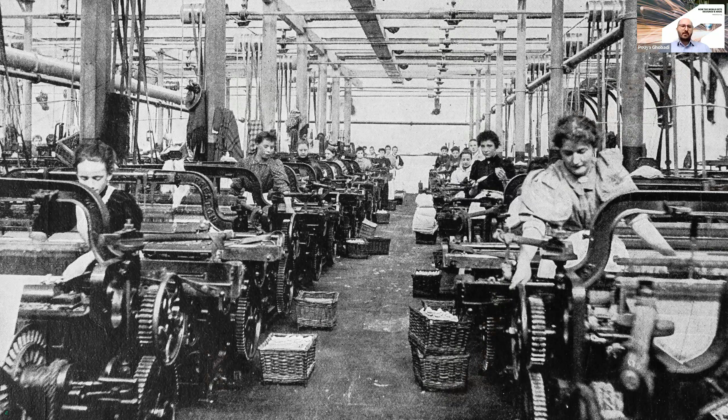Now, the focus of the session again is on factory design, but we know that factories have been around for centuries, and they have come a long way in the previous century. Not just how they operate, but the whole process of how they are developed has changed significantly. Although we have made significant improvements in factory modeling, there is still opportunity to advance in this process.

Despite all changes and improvements, even today, there are many manual, disconnected, and paper-based processes that are keeping us from achieving our factory modeling goals. What we see on the screen here is the reality of many manufacturers and many businesses. We are already stretched to the breaking point.

People spend too much time on manually managing information, tasks, processes, and decisions that could be automated, working with multiple data formats from incompatible systems, trying to overcome the multiple silos that exist in the business, trying to connect a mix of digital and analog data. So the main question our customers are asking is simply, where should I start to address these changes?

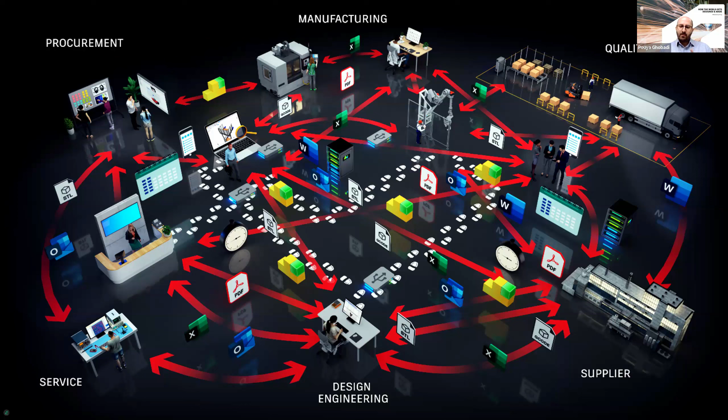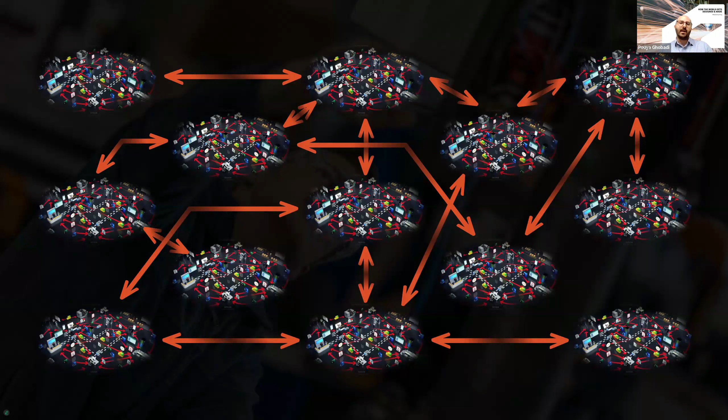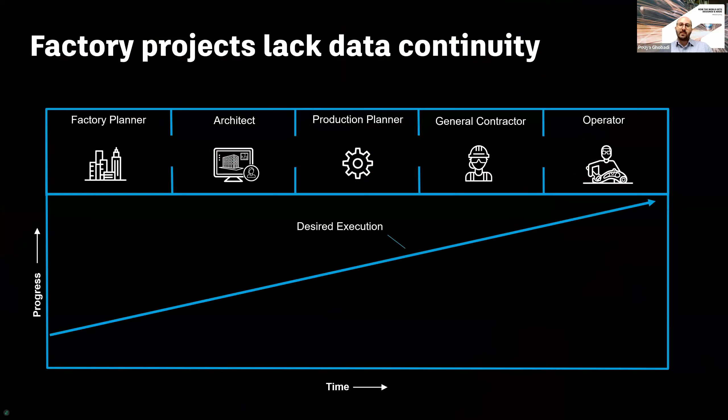But these changes go beyond this. The other challenge that clients are facing is that the chaos that we witness is not just within the organization itself. It continues across the supply chain, affecting the overall operational efficiency and time to market. What manufacturers are trying to achieve is continual unhindered project progress and delivery. But in reality, many factory owners and operators are forced to develop their facilities with disconnected workflows. This needs manual handoff between each stage, leading to longer delivery time and higher costs.

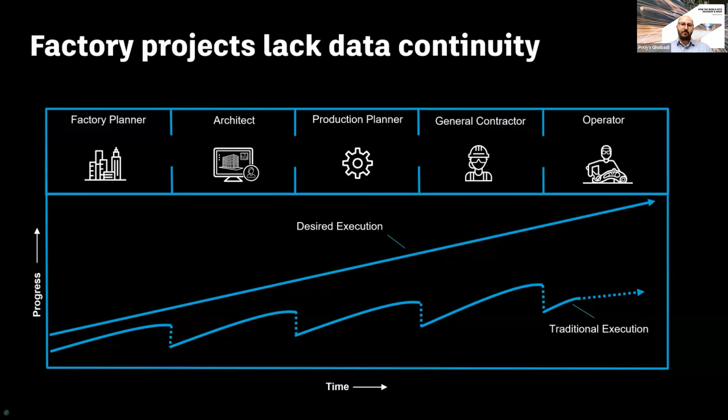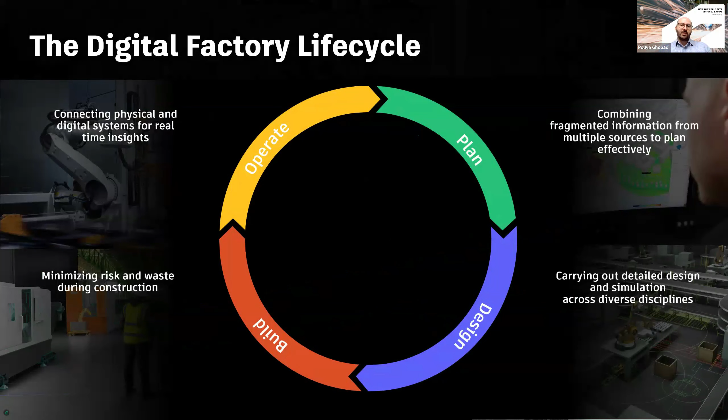Let's have a quick overview of the digital factory lifecycle, which is the goal of the presentation today. We want to digitize this process. There are four main stages of the digital factory lifecycle: plan, design, build, and operate. Each of these stages have their own specific challenges. The planning is where we formulate the approach, define the purposes, constraints, scopes of the project, and that's where we set targets. Design is about working out how we're going to realize our plans and objectives in an optimal way, surrounding both the factory and the building itself.

Then the build process is where we implement these designs, constructing the factory building and internal production facilities. And finally, operate is where we focus on optimizing effective manufacturing throughput to meet our manufacturing targets. These four main stages of planning, designing, building and operating are actually connected together, with decisions at one stage often having unintended consequences at the next step. The more seamlessly they are connected, the more efficient and effective the whole development and operation is going to be.

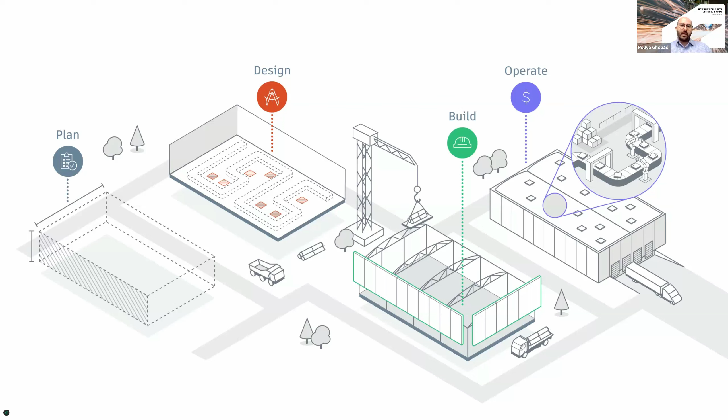When constructing and developing a digital factory, we see and we hear that customers are going from the left side of the screen to what we have on the right side of the screen, going from analog systems to automated ones, replacing fragmented and broken workflows with standardized best practices, avoiding siloed information, making it shared, validated and available to others, evolving stagnant processes to innovative ones, and finally moving away from high-waste situations to agile and lean situations.

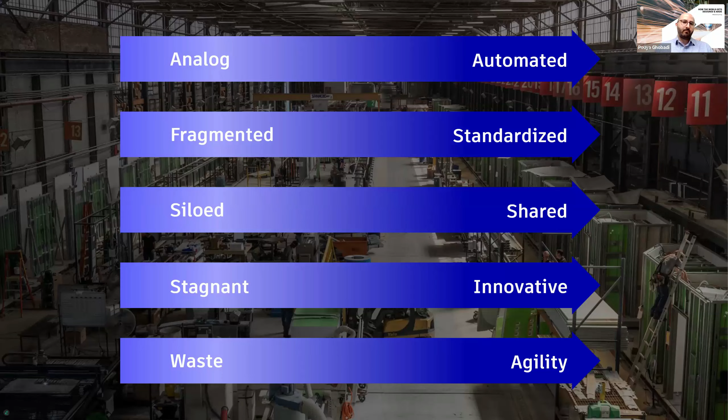In factory planning, a wide variety of trades must be coordinated, and all participants must be supplied with the latest data. This includes production planning, technical building equipment, which could be the ventilation, lighting, water piping, electricity wiring, and so on, and building design.

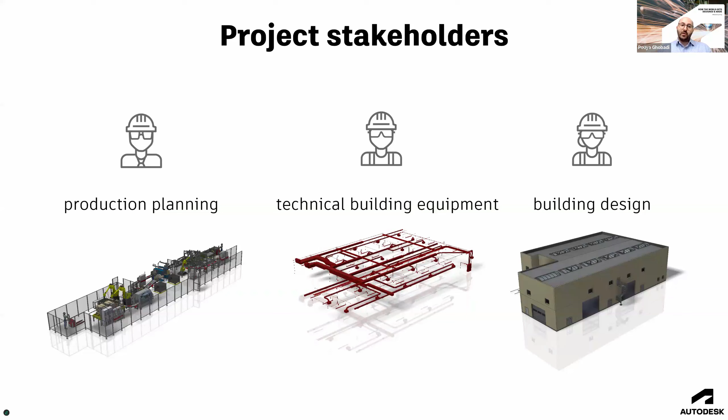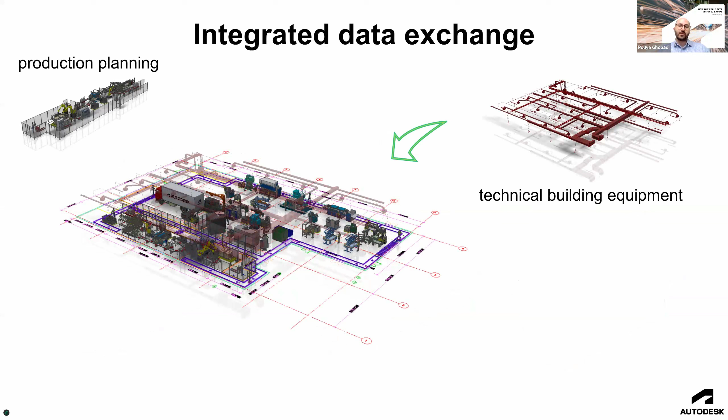Autodesk enables you to bring the data and design related to each stakeholder in one environment and combine all of those designs, all of those models all together. This enables our users to detect errors early on in the design and planning phase and avoid costly mistakes.

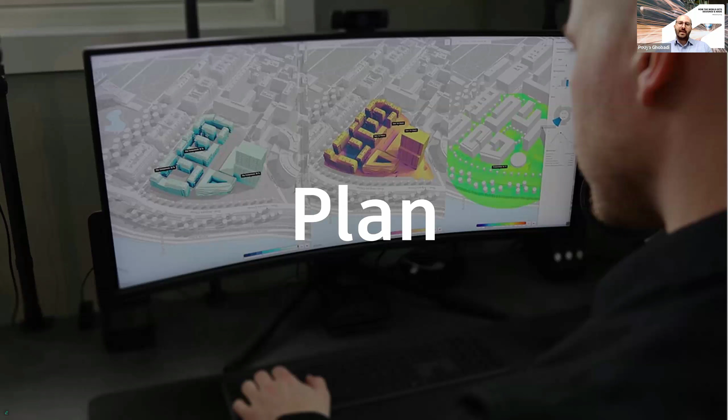So let's go through these phases. Let's go through specifically the plan, design, and validation phases and see how Autodesk can assist you in combining the data related to these phases. Let's start with the planning phase.

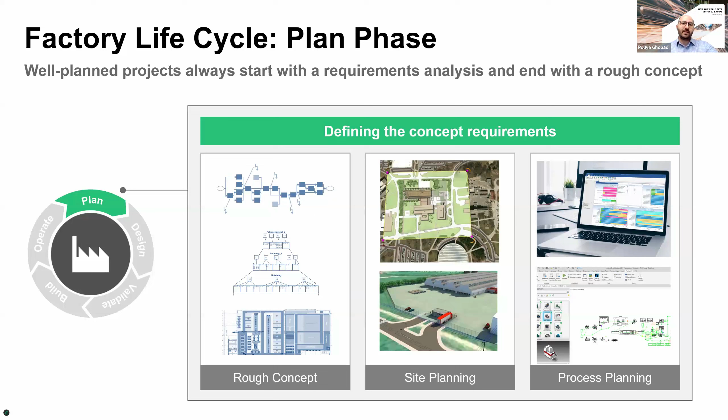Planning starts with the land or site development. Different types of planning include site development planning, process planning like the manufacturing sequencing, or it could be product lifecycle planning, and also planning for the building itself, the building that you're going to place within that site.

To address this challenge, we can utilize Autodesk InfraWorks to address the challenges associated with the planning phase. Let's say you have a plot area where you want to create the concept layout of your factory. This is where you can extract the longitude and latitudes of your site simply from Google Maps, insert it into Autodesk InfraWorks, and start building and developing your plan within InfraWorks quite seamlessly.

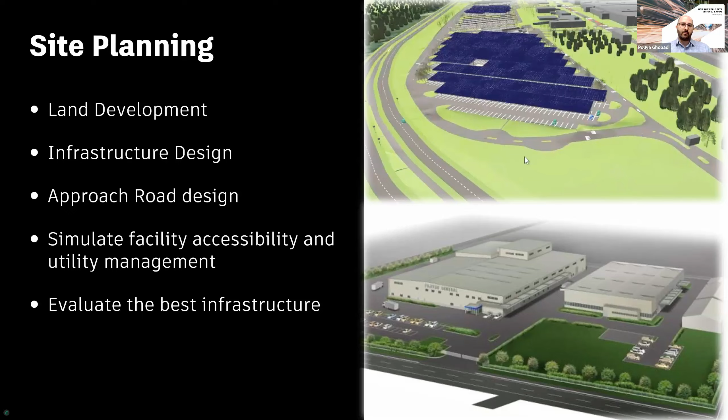Using Autodesk InfraWorks, you can define the utilization of the area, determine where the roads are going to be, design the infrastructure, and the layout of your buildings. Let's look at this in action. Using InfraWorks, you'll be able to gather the site area and mark the coordinates, as well as the boundary of the site.

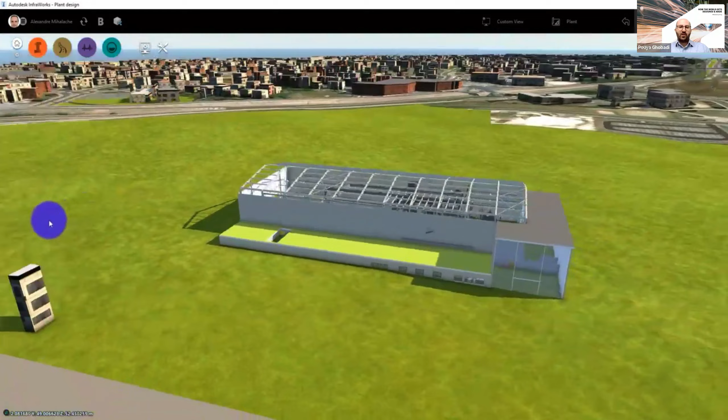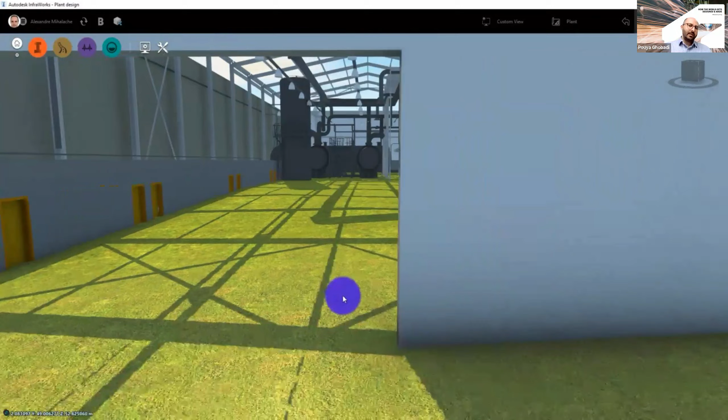Let's say you have a building like what we have here. You have a building design that was created by another team. You can bring those models, in this case designed in Revit, simply bring them into InfraWorks, and then start developing, in this example, the road layout. We have a library. Simply from the library, you can select the type of road you want.

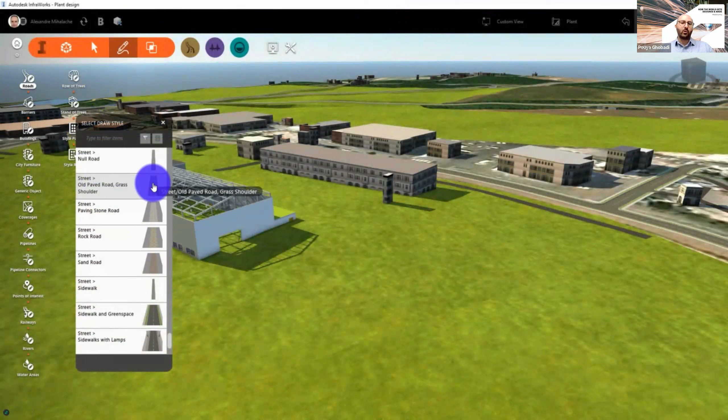You can see how we can define the road itself, connecting our factory to the main road. And by doing this, it will take into consideration the banking, the ground slope, and everything else for us. And then from there, you can seamlessly conduct a cut fill analysis within InfraWorks.

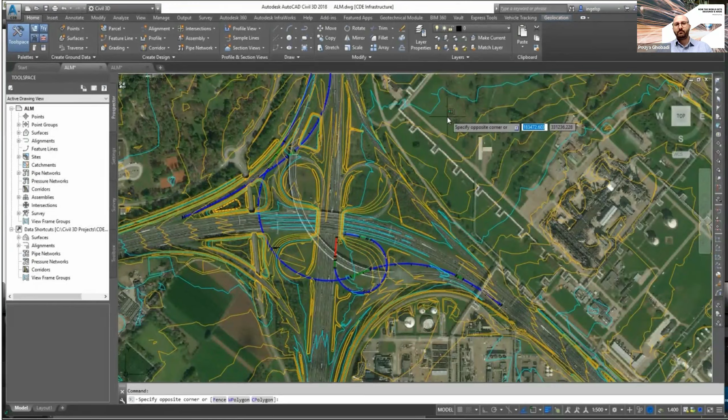But how about process planning? Industrial process planning includes the systematic design or organization of production processes to ensure efficiency and quality. It also includes defining workflows, selecting appropriate machinery and technologies, and optimizing resource allocation.

Currently, users are doing this planning process through manual and disconnected tools like spreadsheets, flowcharts, and so on. But this is resulting in errors and challenges to accurately manage the cost, to accurately manage the risks and downtimes, and to accurately calculate the long-term impact of the changes that we want to apply to our factories. So how can we optimize our factories to address these issues?

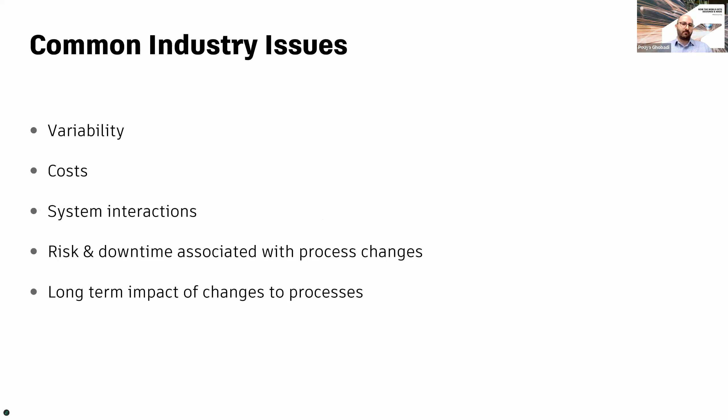This is where Autodesk FlexSim can address your challenges. FlexSim is a tool that simulates the flow of all resources and processes, including manufacturing, material handling, and even logistics, and even people in the factory.

Customers can use FlexSim for a multitude of reasons, including identifying bottlenecks, validating new layouts and processes, and optimizing production processes. This helps support outcomes such as increasing manufacturing throughput, reducing resource consumption, and of course, improving profitability for your manufacturing facility. Now let's take a quick look at FlexSim in action.

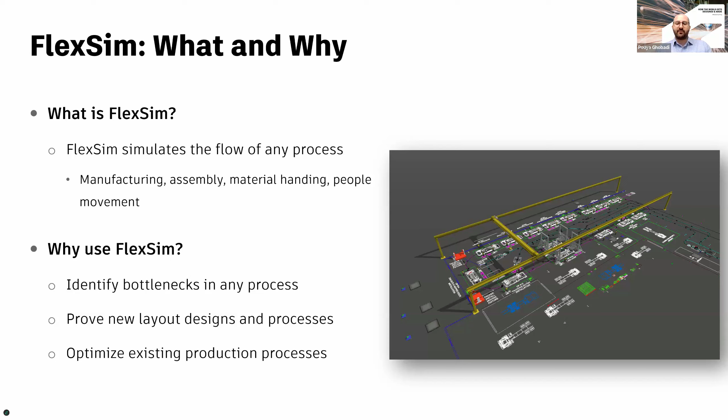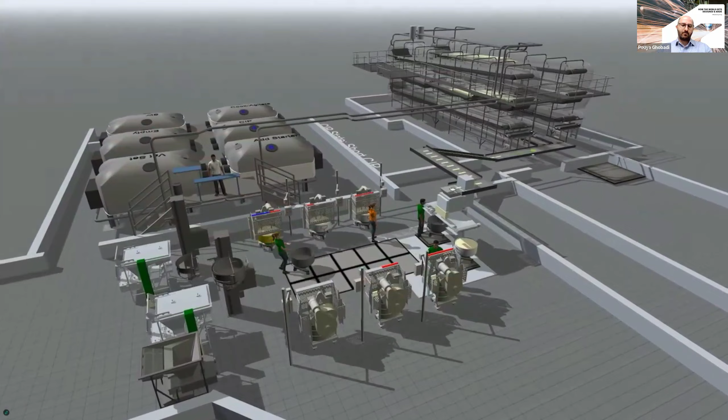FlexSim is an object-oriented 3D simulation software that handles both discrete event and continuous simulation. It allows you to model any type of sequential flow or factory operation. If you manufacture products, build assemblies, or have warehouse or supply chain operations, FlexSim is the simulation product for you.

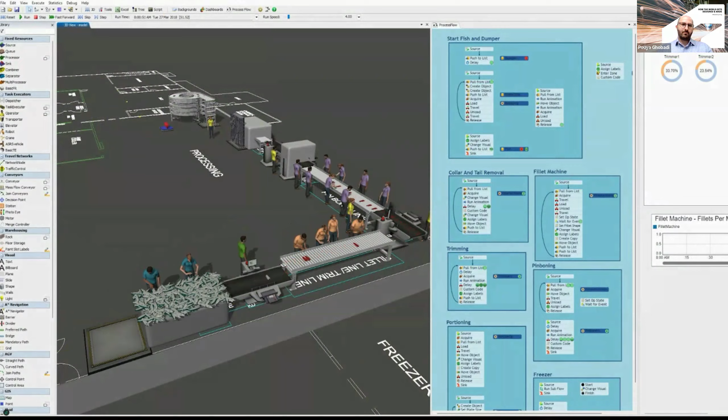FlexSim is used to eliminate waste in a production process, with waste being any action that doesn't add value to the customer. Waiting adds no value to the customer, and it's expensive to have excess waiting time for customers, products, and machines. FlexSim is a 3D simulation environment, so you can start with an AutoCAD file of the facility and drag out the resources for a true-to-scale model layout.

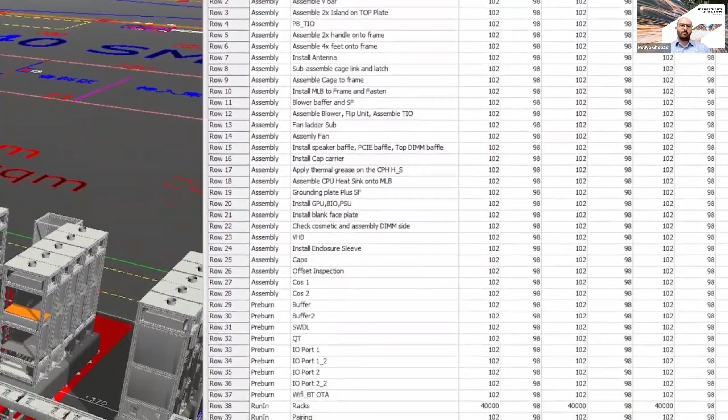The software also features a script-free logic building environment called Process Flow to help you describe even the most complex processes. This combination of drag-and-drop 3D technology and innovative logic building allows a user to model any system quickly and efficiently. Then bring your real-world data into FlexSim directly from Excel, a database, or an HTTP server using the latest available data to make accurate predictions about future production.

Fantastic. Let's take a look at the next phase, which is design. Design phase can be broken down into three sectors: designing the 2D layouts and converting those 2D layouts into 3D models, which is developing the 2D layout in AutoCAD and then automatically being able to synchronize it with your 3D models, let's say in Inventor and Revit and so on.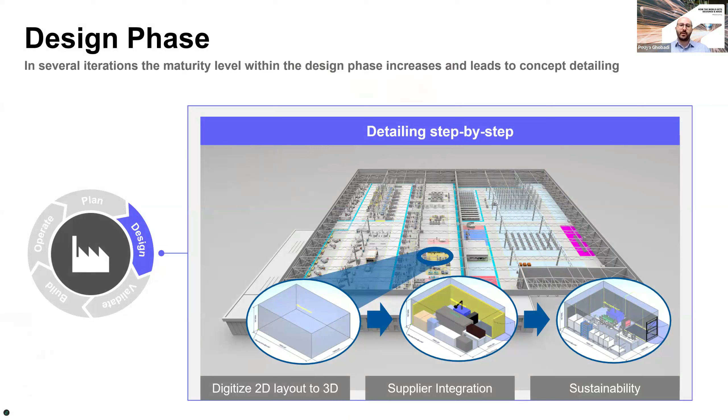Next is supplier integration. When you receive machinery from your vendors and suppliers, you will need to be able to integrate them into your factory while avoiding clashes either between the equipments themselves or between the equipment and the factory facility that you have. And finally, making sure your factory is sustainable in nature.

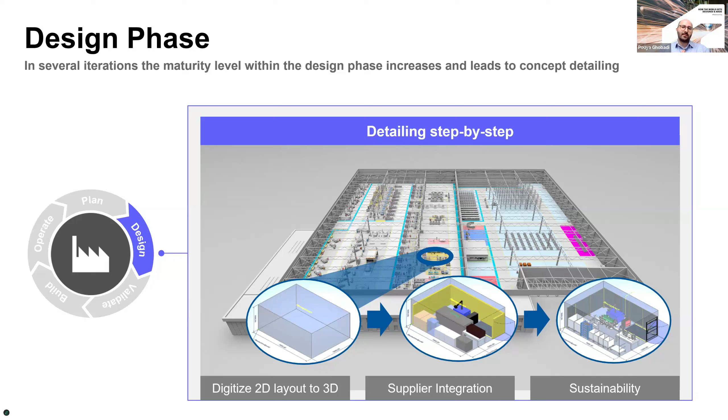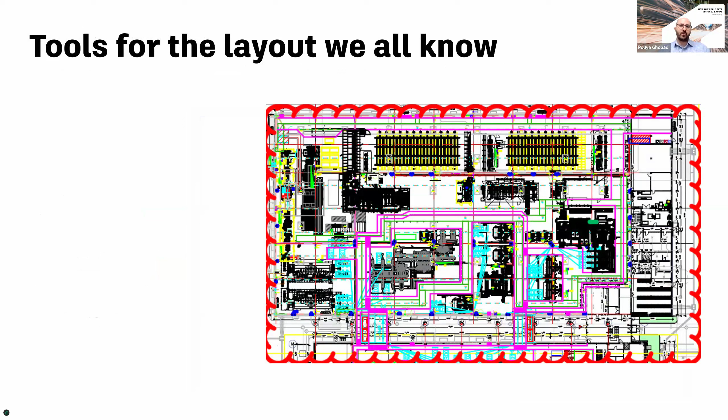For the most part, layouts are still created in 2D. These layouts are usually readable by only professionals with a lot of experience, and of course are error-prone because the third dimension is missing. Also, all accompanying documents like Word, Excel, PDF, and handwritten documents are distributed separately via mail. This can result in a lot of errors due to lack of third dimension and lack of connections with the third-party applications that we just mentioned.

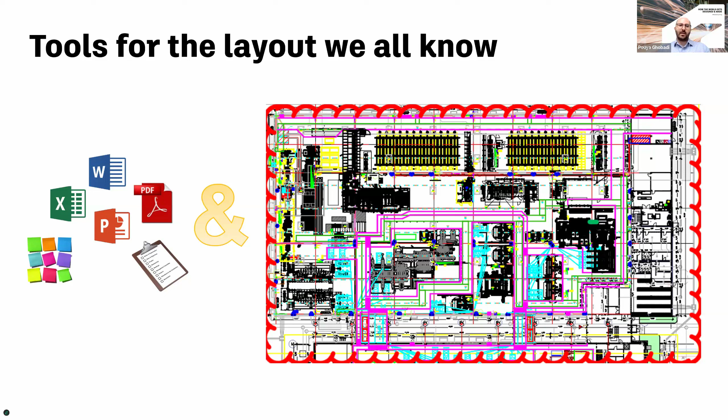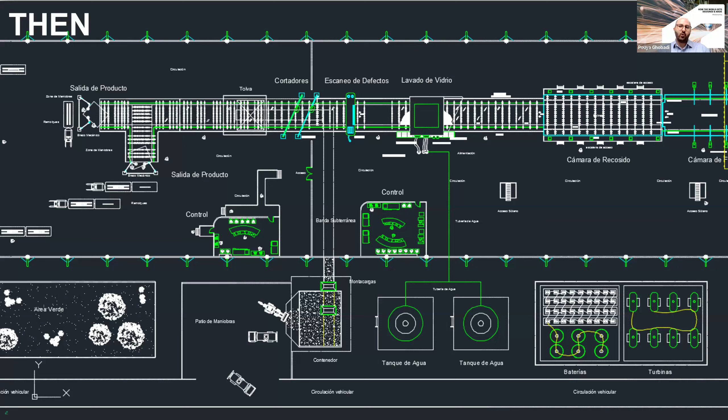Let's consider an example. Of course, AutoCAD is the industry standard for layout tools today. It is a very powerful tool for planning, but it doesn't represent the full manufacturing environment. Real production environments are much more complex. Errors are typically introduced when information is missing, like the vertical dimension, or what needs to move or be removed, or how items will be moved into position.

That is where Autodesk is unique in its offering. We have a set of collections named Autodesk Factory Design Utilities, especially designed for factory layouts. By using Factory Design Utilities, you can start creating your facilities in 2D using AutoCAD and its library of assets with a series of libraries that are available and pre-built for you. As soon as you start using the assets by placing them inside AutoCAD, the 3D model will be automatically generated as well. While you create the 2D layout, the 3D model is automatically created.

You don't have to work exclusively in 2D; you can start modifying the model in 3D. The connection is bidirectional, which will also modify the 2D model for you automatically. Both 2D and 3D have the same set of libraries and assets that are bidirectionally linked. Let's look at an example.

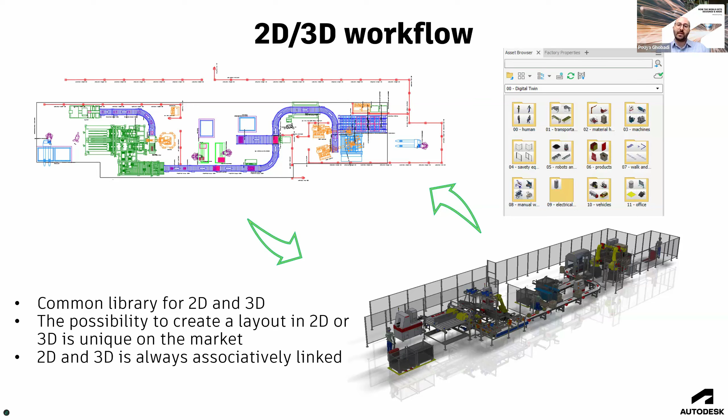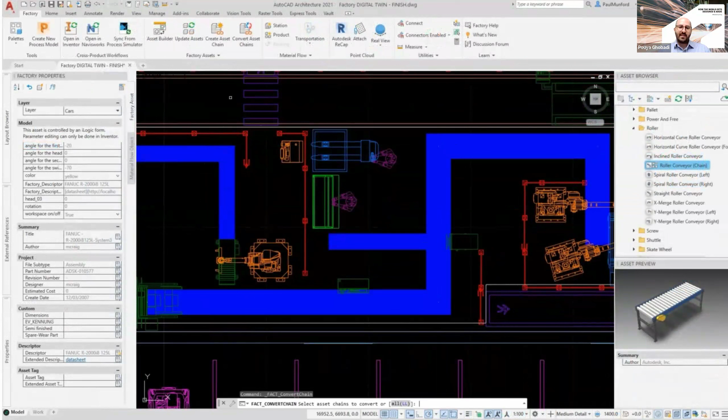Let me show you an example of how it works. Here in AutoCAD, I'm pulling all the assets I need from my library in AutoCAD to create my desired layout in 2D. In this example, we are setting up a conveyor belt system. You can simply define the path, and AutoCAD will automatically add the corners and determine the correct number of sections for the belts. Now, since these are dynamic assets, you can still modify them as you need, as we can see on the screen.

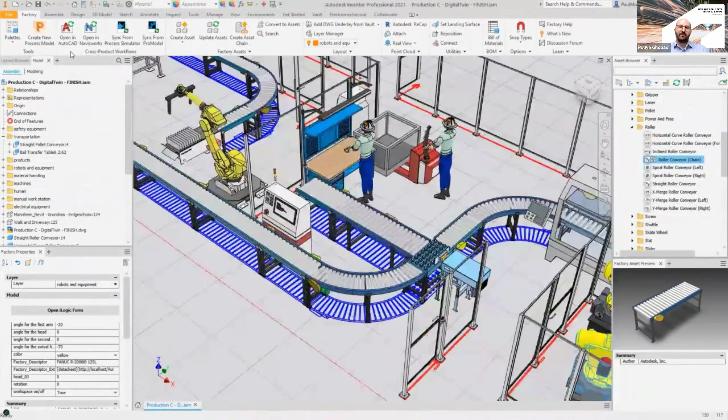Once your 2D layout is created, you can simply sync the 2D layout with 3D in Inventor by simply selecting Open in Inventor. This will convert your 2D layout to a 3D model, allowing you to continue modifying your layout now in 3D. This will enable you to easily visualize any clashes in your model, maintain an accurate bill of material, and create 3D-based drawings of your layouts.

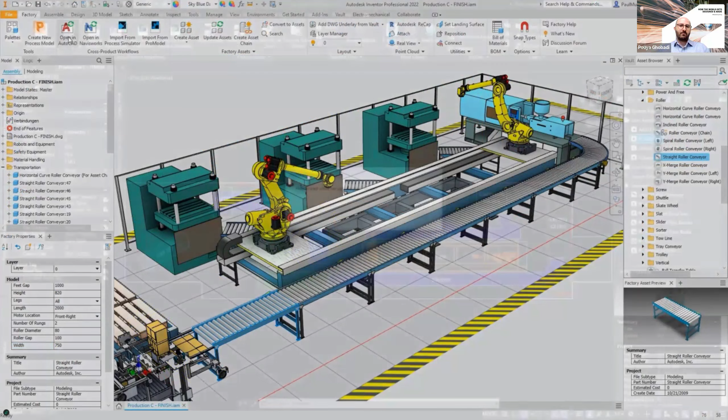Till now, our presentation was focused on greenfield projects, projects where you don't have a factory and you have to design the factory from scratch. But how about brownfield projects, where you already have a factory and you want to update your factory due to new requirements? This is also applicable when you need to improve the efficiency or output of an existing facility. We also have this scenario covered.

In this case, you can simply capture the 3D scan of your facility, insert your scan into Autodesk ReCap Pro, and convert your point cloud data into a solid model. This will enable you to start creating models upon the 3D model of your facility.

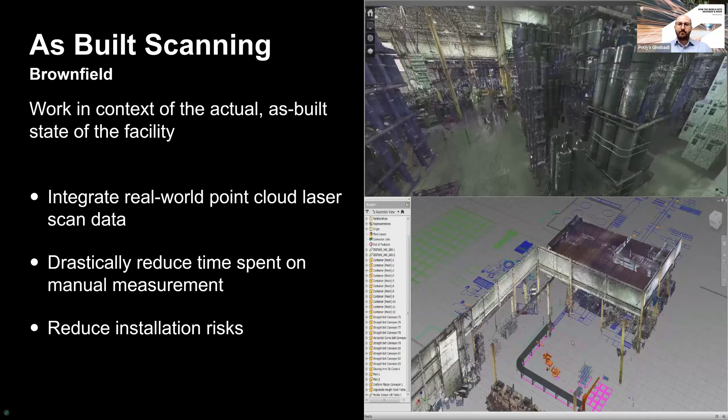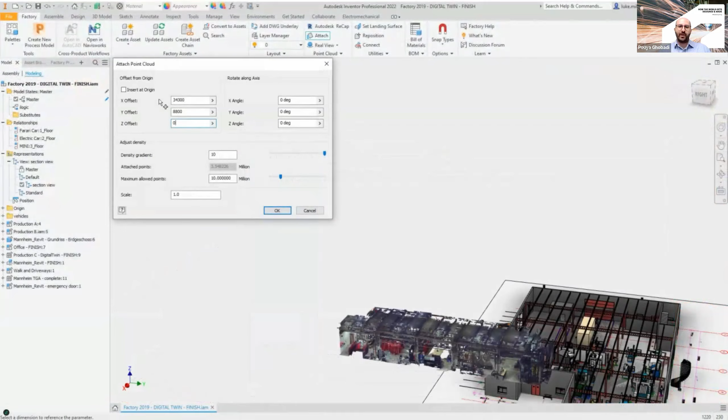Let's have a look at an example where point cloud data has been inserted into ReCap. After capturing the point cloud data using the scanners, we can bring it into ReCap. And in ReCap Pro, you can inspect your facility and convert your scan to a 3D model, and then bring the model into Inventor or Navisworks or even Revit. After inserting the model into Inventor here, you can then start creating additional models in reference to your factory.

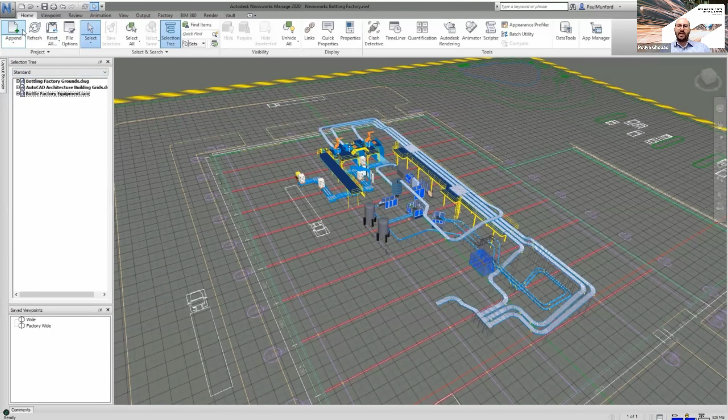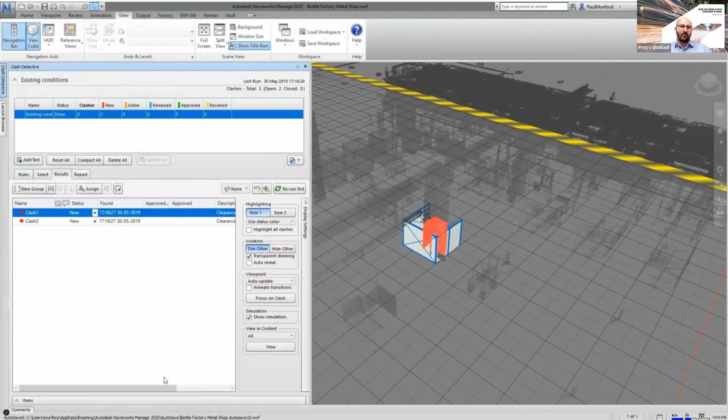Once your model is finalized, in Autodesk Navisworks, you can identify if there are any clashes between your scanned facility and the newly generated model quite easily and capture a report. After finding the clashes, as we can see in this example, simply go back to your Inventor model and modify your model to avoid the clashes. And this is going to save a lot of time because you're finding these errors early on in the process. We will come back to this in the validation phase, and we will talk more about it.

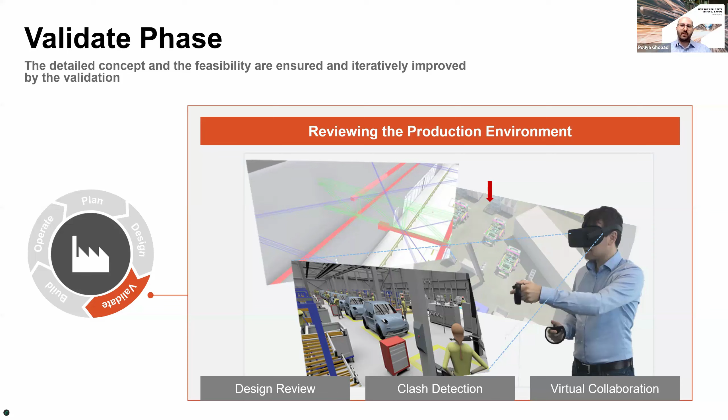So how can we assist you to validate your factory design before you commission your factory? Let's look into that. Validation can be done in two different phases. One is the complete design review, which can be done through clash detection in Autodesk Navisworks, which we discussed briefly. And the other one is virtual collaboration through our VR-based collaboration tools like Autodesk VRED and Autodesk Workshop XR.

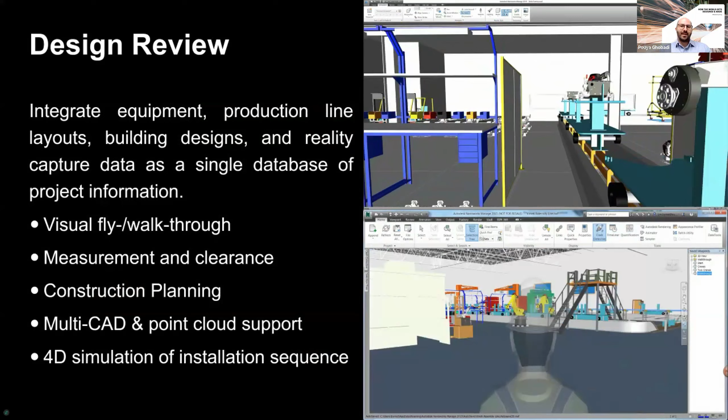Once the entire model is ready, you can collate all the different models provided by various suppliers into a single model in Autodesk Navisworks and conduct walkthroughs and clash detection analysis to find if there are any issues with your factory design. This will enable you to identify errors in the earliest stages and avoid costly mistakes. Mistakes like what we can see here on the screen.

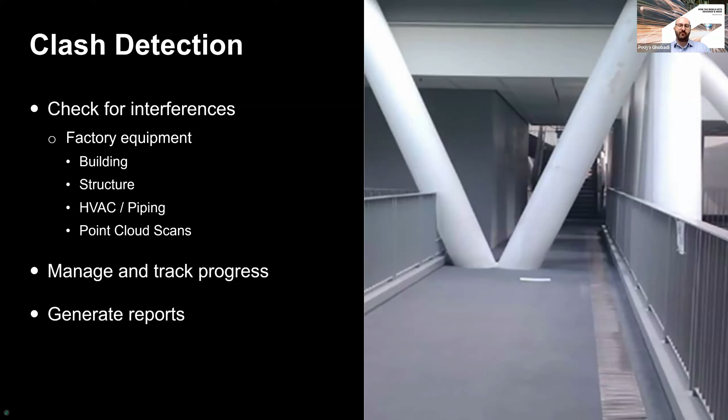Autodesk platform allows you to collate models in Navisworks from multiple sources, conduct clash detection, and avoid collision between the structures, pathways, equipment, and so on. And all of this is going to be done in the validation phase, very, very early in your process. Let's have a look at another example.

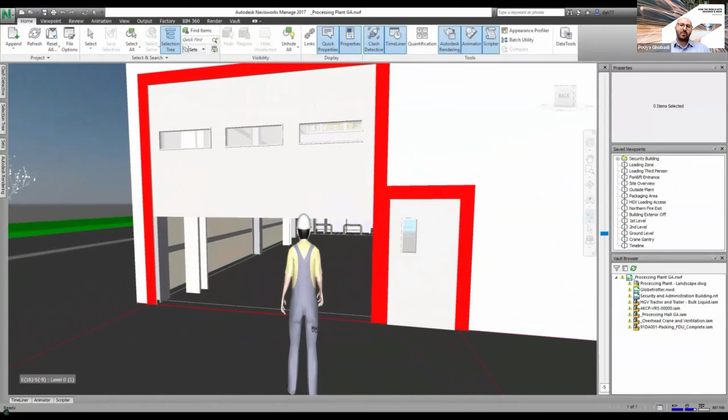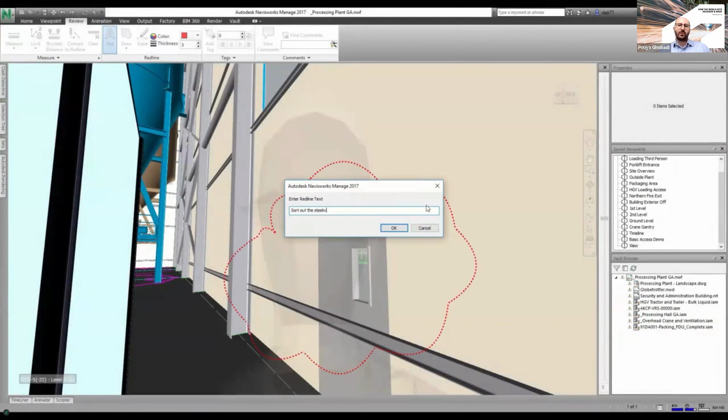Here we have an example in which we have imported our factory's building, the structure and the equipment all into Navisworks. In Navisworks, we can then conduct a walkthrough to inspect the full model. You can also apply markups and create reports if you come across an issue, all within Navisworks. Like the issue that we are seeing here, simply mark it up. From here, you can go back to Inventor or Revit and apply the required changes.

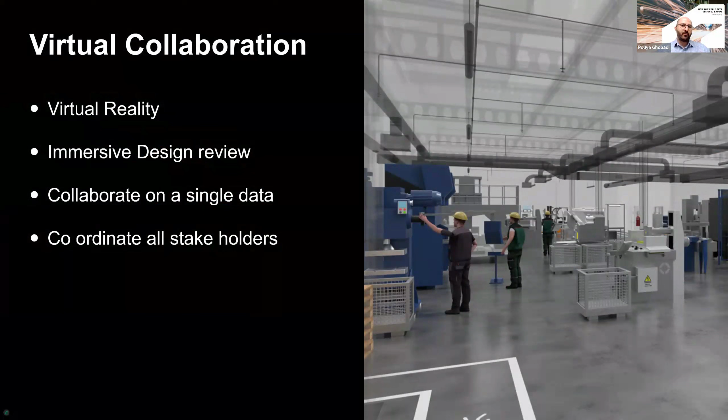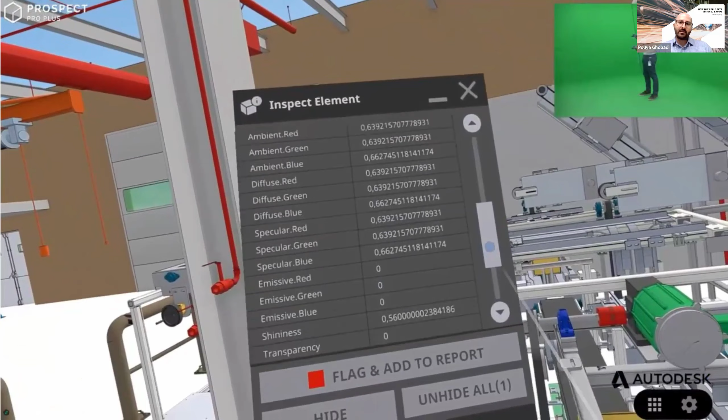While Navisworks is a tool for managing clashes and conducting reviews, we also have virtual reality-based tools where you can include multiple subcontractors, your clients, or even your team members to perform a virtual review of your entire design. Let's look into that. Here we have taken our Navisworks model into our virtual reality platform, Autodesk Workshop XR, a cloud-based virtual reality tool that enables us to conduct walkthroughs, create markups, and conduct reviews.

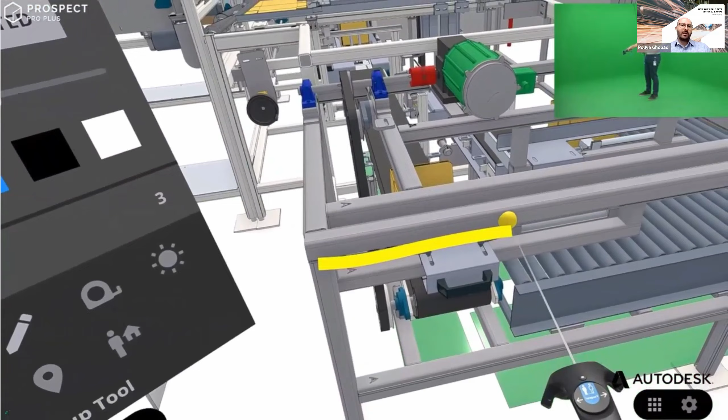In this example, we can see the user has identified an item that needs to be changed. They simply create a markup in the platform, which will notify the other users in Workshop XR. The notification can also be sent through Autodesk Docs for other users to apply the required changes.

You might also need to conduct a CFD analysis on your facility. This is where Autodesk CFD can offer you the required tools to analyze wind, heat, airflow, etc. Autodesk CFD offers interoperability with other Autodesk tools like Inventor and Revit, enabling you to simulate not only your equipment, but also your entire factory. Conduct analysis such as smoke detection, air ventilation, wind analysis, pollution analysis, and more.

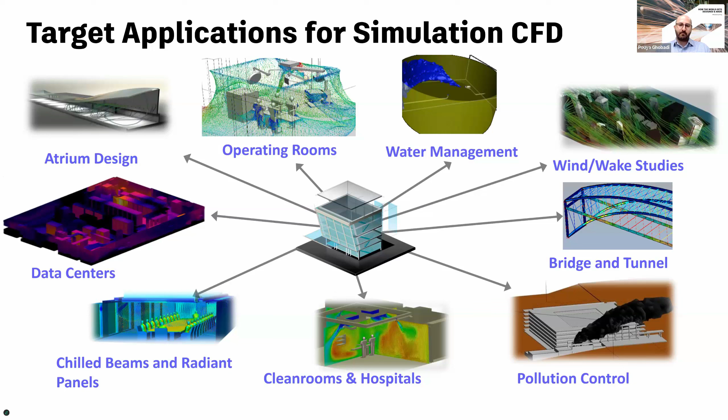While going through your factory design process, we are obviously creating a lot of data that needs to be securely managed and stored. We need to securely manage all the assets, provide access to these assets to authorized users, and manage the history of all modifications applied to layouts and equipment. That's where Autodesk Vault comes in. Autodesk Vault is Autodesk's Enterprise Document Management System, which can manage your files as well as the entire asset libraries and layouts of your factory.

Vault will also enable you to securely store your models and securely reuse your models. For example, if there is a sub-layout of your factory that you would like to use for another project, Vault enables you to reuse that sub-layout without causing any errors. Let's look at Vault in action.

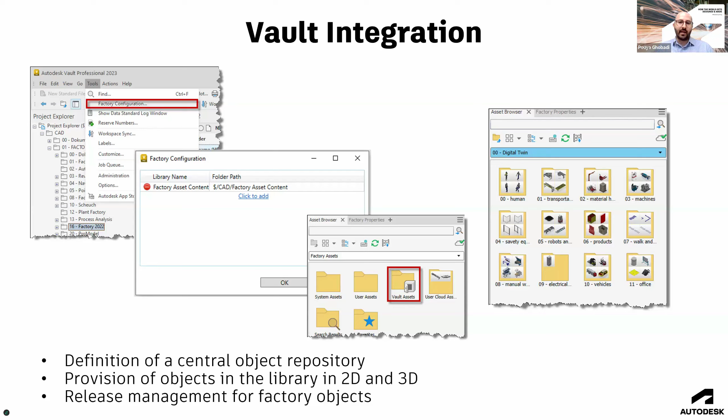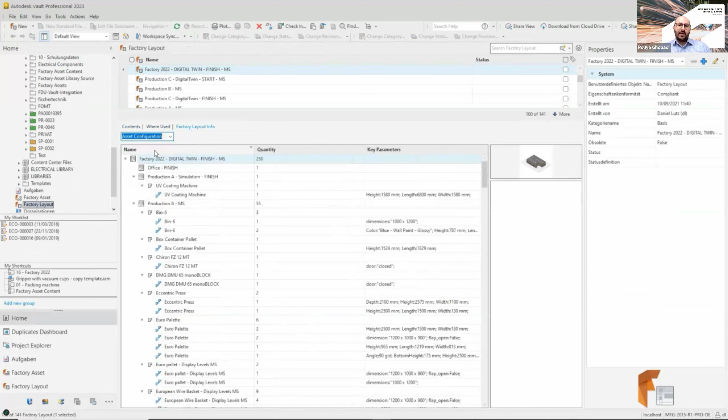From Inventor, it is possible to switch directly to Vault via the Vault browser. The overall layout and the Vault factory layout are displayed via the Where Used tab, simply accessible in the Vault interface. Then from there, the Go-To tab can take you directly and quickly to the factory area. There, all used sub-layouts and all factory objects are displayed with their key parameters.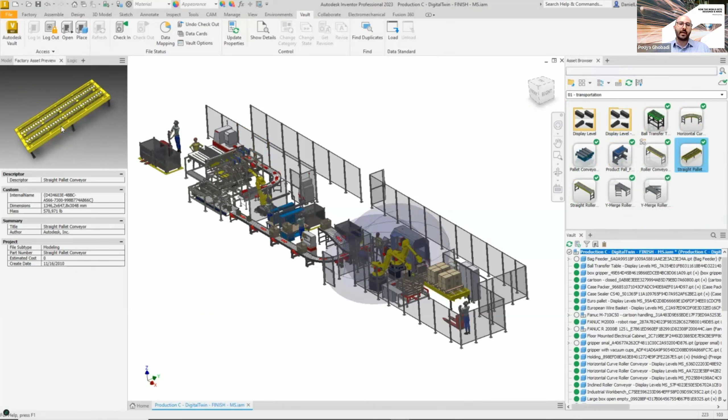In the factory configuration, the object area is defined. One or more folders can be specified in which the objects are subsequently stored. Now, in Inventor and AutoCAD, these folders are displayed as part of your asset library and quite easily accessible for you to reuse.

Now, let's have a look at a couple of examples of customers who have actually utilized Autodesk Digital Factory. I'm sure you're all familiar with Porsche. When Porsche opened the factory to support its first fully electric sports car, they planned for a digital factory. The first challenges included the site's location in a hilly urban area.

They had to work closely with designers and planners to address every part of the building in advance of the build process itself, and relied heavily on model coordination and clash detection in the digital platforms that we provided to them. They used a single integrated model that allowed all stakeholders to come together to create the final factory. Porsche even introduced a driverless transport system to move the cars, tools, and equipment within the factory, all created and tested in advance in the virtual reality environment.

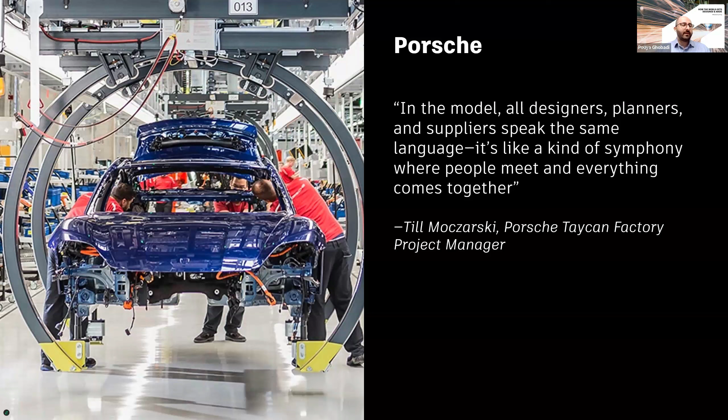Building and validating the factory digitally gave Porsche the advantage to improve time to market and generate revenue much sooner. Let's look at another example. Let's hear from Northvolt as they talk about their experiences using a broad range of the Autodesk portfolio, from Revit to architectural design to Inventor Factory Design Utility to optimize factory operations to Autodesk Construction Cloud for model management.

Northvolt is a battery manufacturer that designed and built their entire factory using Autodesk tools. They use tools like Inventor Factory Design Utility for layout, Revit for building, Advance Steel for civil structure, and so on, and coordinated everything into a single model and created an efficient factory. Let's hear from Northvolt how they made this process work.

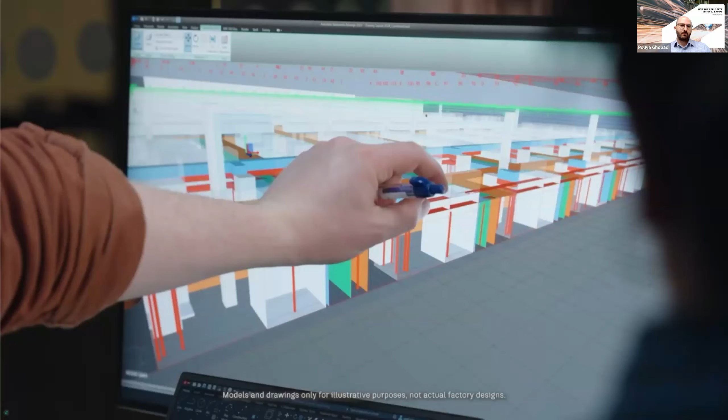What set Northvolt apart from conventional battery manufacturing is this rooted commitment to sustainability in everything we do, from the product design to the recycling approach that ties it all together. The factory is an inorganic organism where every single component needs to work together for this common goal. So we need to think of how we can design and work with the product in parallel with the process and production, with the facility and factory, with construction, commissioning, and just get it all done. Our designs need to account for that.

So we need to build our ecosystem around tools that talk very well together. Data loss is unacceptable. Whatever he's doing, I need to see it. Whatever she's doing, I need to be able to see it and share it with the right people. Autodesk provides that platform to build this toolbox for us. For the architects, we use Revit. It's very efficient to draw buildings.

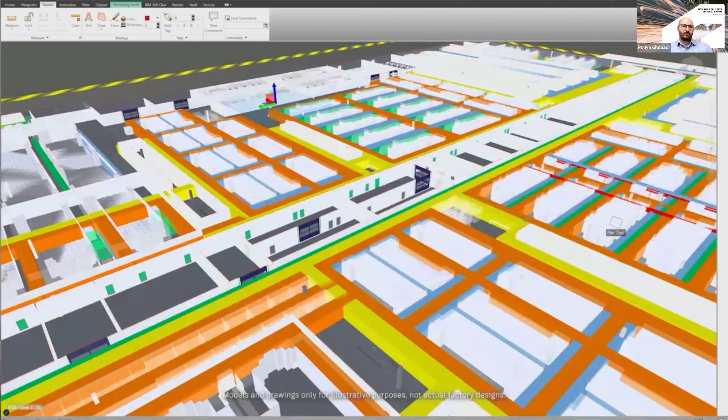For more process layouts about placement of machines on floors, we use the Factory Design Utility tools with Inventor, with AutoCAD, with Navis in a Vault PDM environment. For BIM coordination, we use Navisworks to compile everything. For model management and collaboration, we use Autodesk Construction Cloud to really have a cloud-based point for all stakeholders to

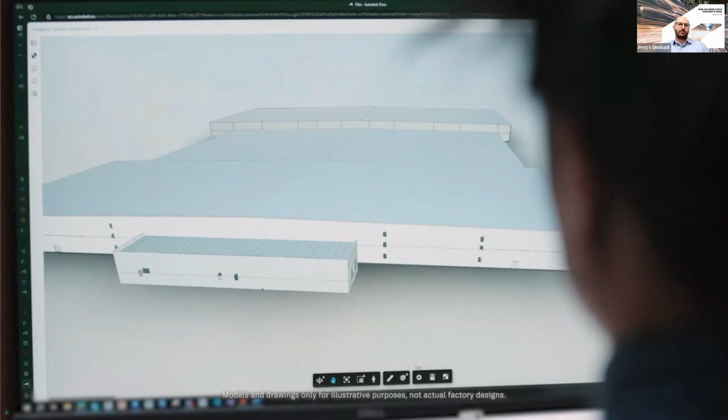watch this common model. So now we're very excited about Autodesk Platform Services, which basically enables us to access many different APIs and tools within the Autodesk ecosystem and put them together in different ways to bridge the gaps between the different tools and make them do almost exactly what we want them to.

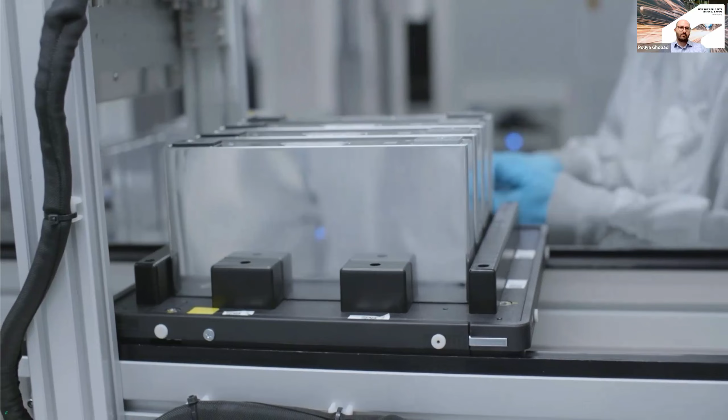We have proven that you can build industry in a new way, that the sustainability mission is not mutually exclusive from being profitable and commercially successful. We have been able to significantly optimize factory design, and we can show it with numbers pulled from a live model. Yes, it is cheaper, it is smaller, it is more efficient. That's something I'm very proud of, to have opened that door and opened the mindset to enable the next era of industry.